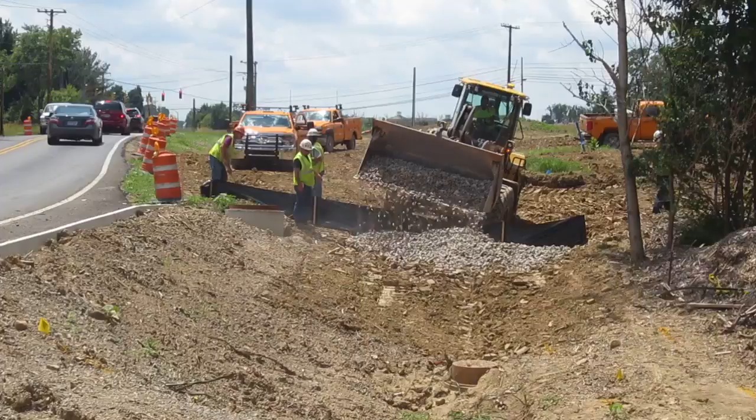Here we got some guys putting up some black plastic and front end loading in some gravel and doing stuff. Don't really know what that's in aid of, but that's what they're doing right now. High drama.

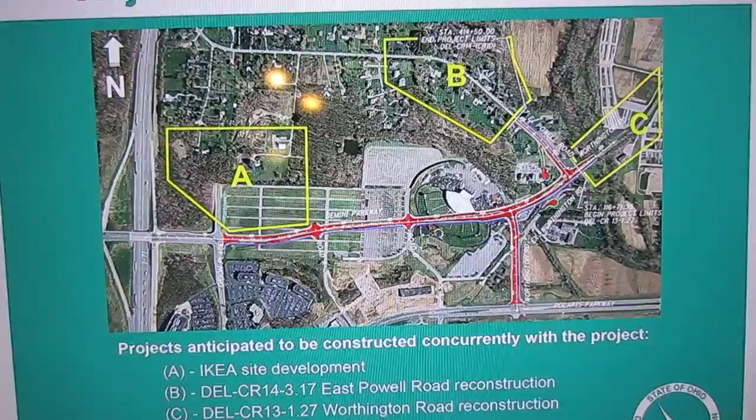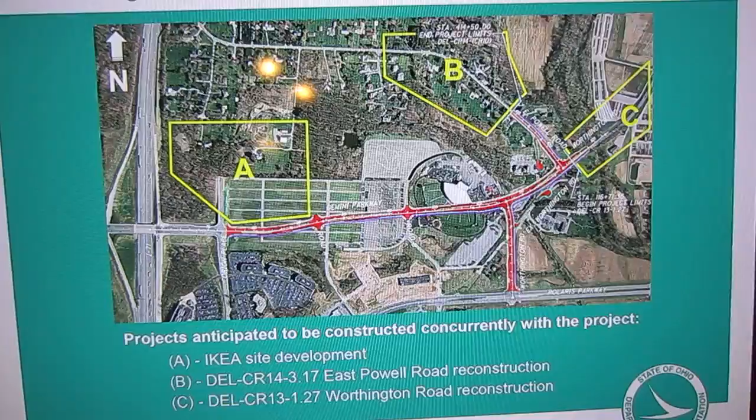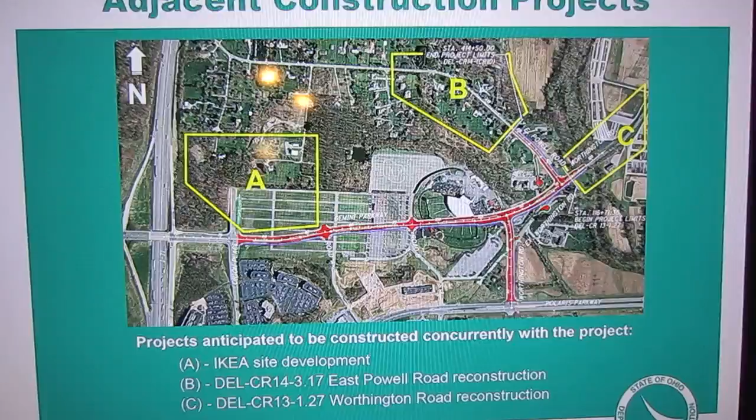Now look very closely, guys. Here is what's happening around me. Area A is the IKEA site development, where we're getting a new IKEA store. Area B is where East Powell Road is going to be widened. And area C is the Worthington Road reconstruction.

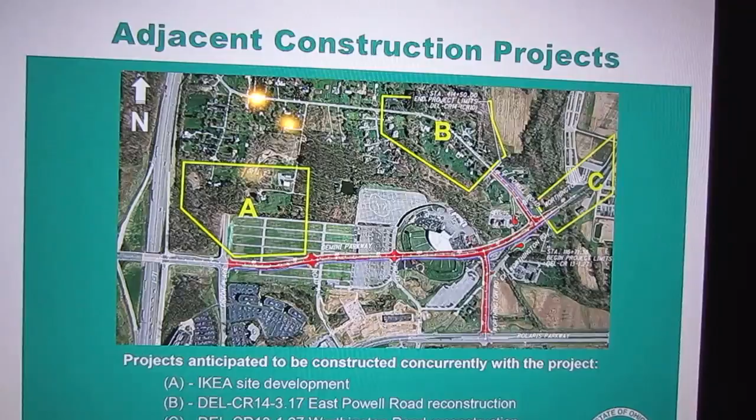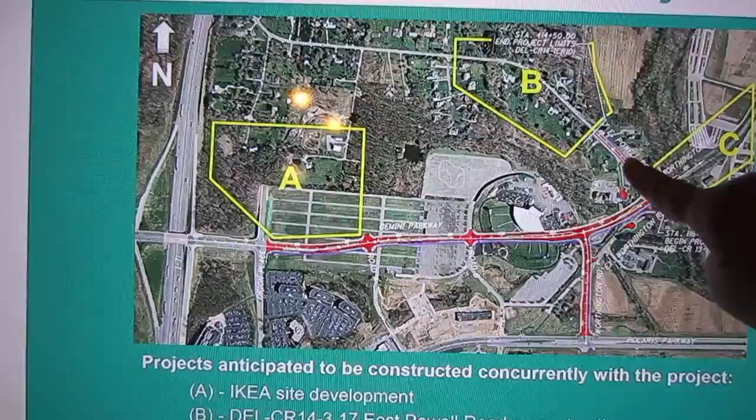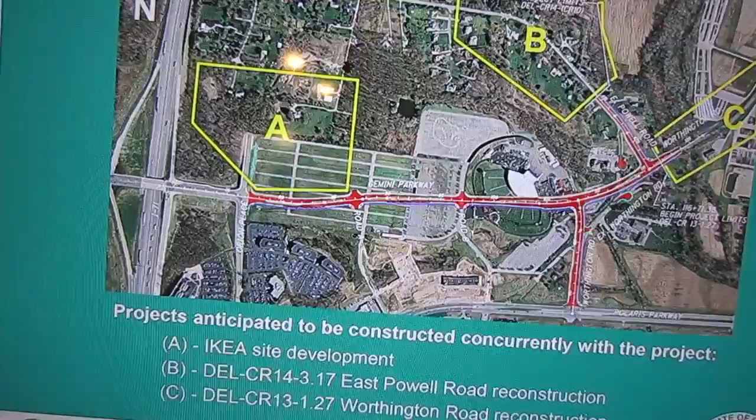But note that this is going to be the new Powell Road. This is the old Powell Road as it exists. And here is my property right here. There's Alum Creek, and that's their Acorn Farms nursery over there. So that's what's happening around here.

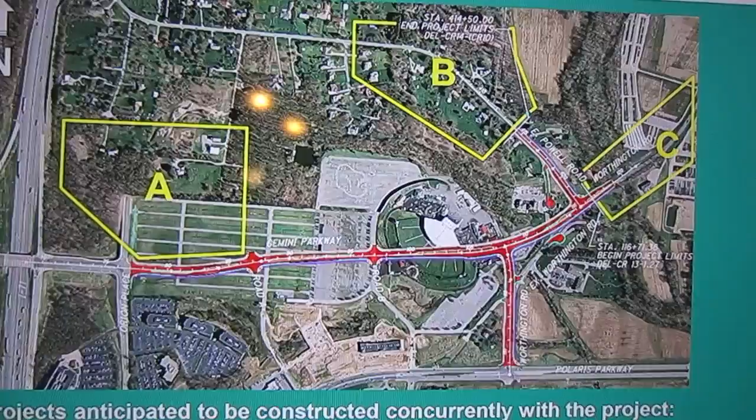Let's get a little closer now so you can sort of get a closer look at it here.

Now here's a little larger, well, it's a different view. It might give you a better idea. This is an existing road called Orion Place. It comes off this road down here called Polaris Parkway, approximately about here where there's an intersection, down here. This is going to be a new development of the big Swedish IKEA thing here.

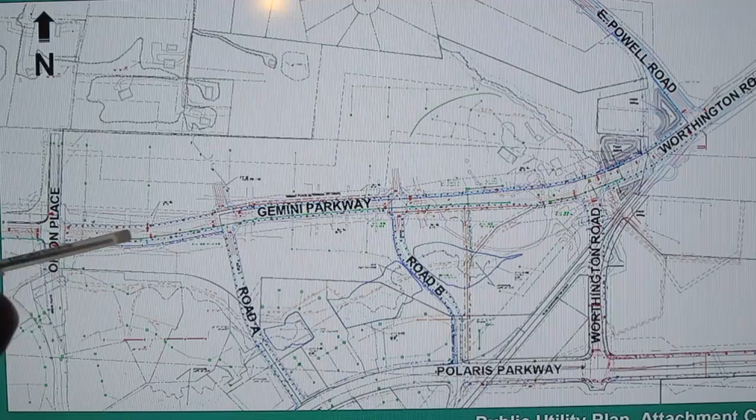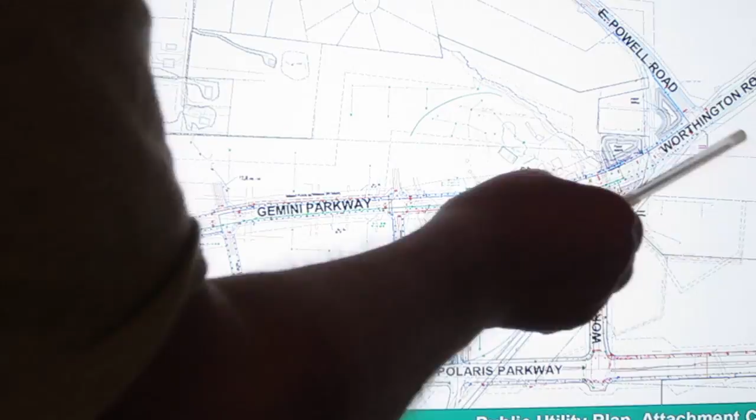Gemini Parkway ends currently, or did until recently, right here. They're going to shoot it on down here to connect with Worthington Road and go across over to Africa Road in this area. Here is the current existing East Powell Road. This is going to be the new Powell Road.

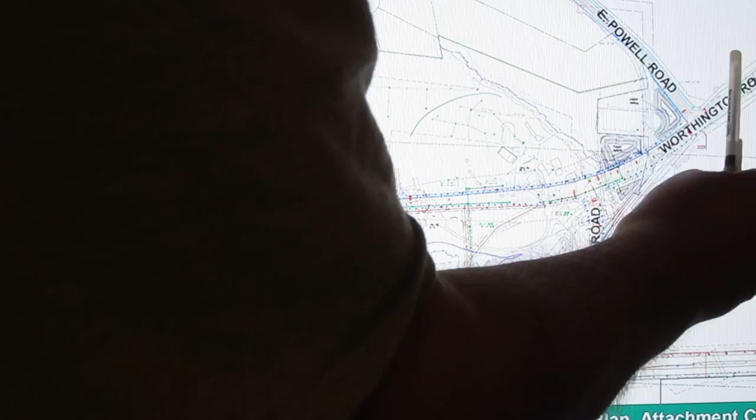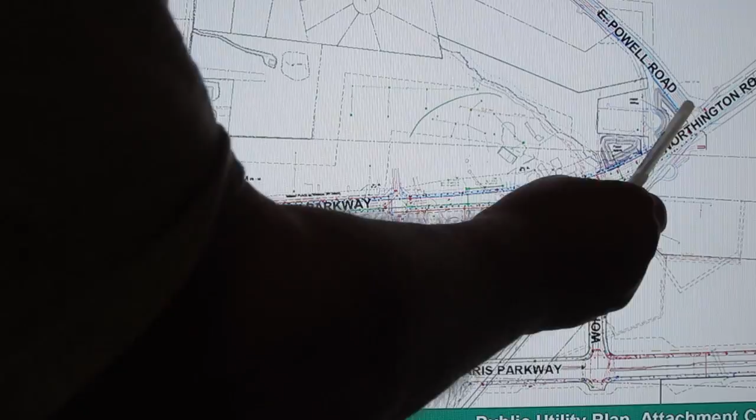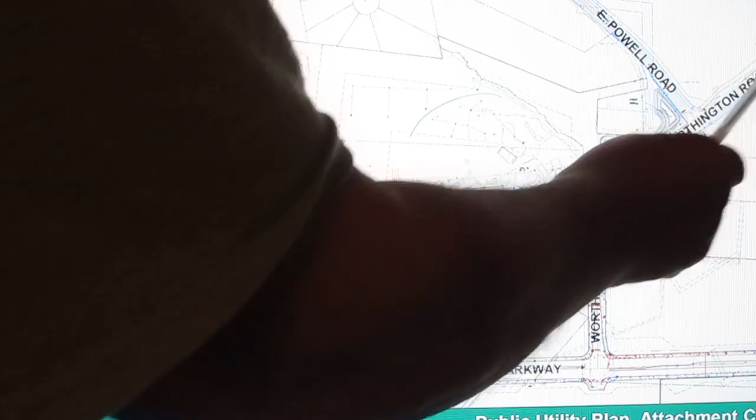Currently, if I want to go out of my house, what I do is I go out of my driveway about here, I'll get on Worthington Road. I'll go down to this drop down, which is also still called Worthington Road, and go to Polaris Parkway. Or more typically, I just use Powell Road to go where I want to go to the west of me. I almost never go east, and I almost never come back from the east. That was the whole thing about the driveway.

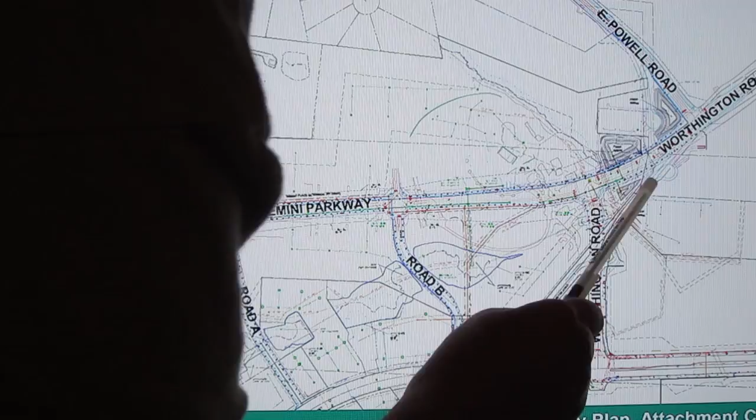So you can see what they show they're going to do. They're going to make a cul-de-sac where the old house was. For Liz and Henry's, and indeed my neighbor Fred's place, Liz is about here and Fred's about here. What they'll do is use the existing road bed of the current Worthington Road, turn it into a cul-de-sac, and run a driveway off that. Here's an outfit called Laurel Health, and they'll just have their current driveway off the existing road. But it's going to tie into this drop-down road here.

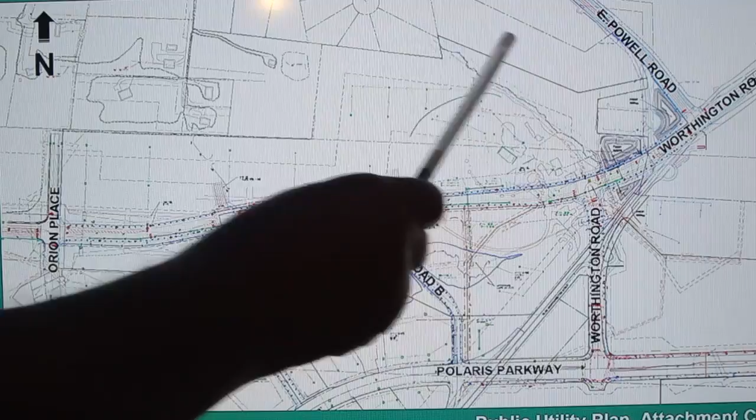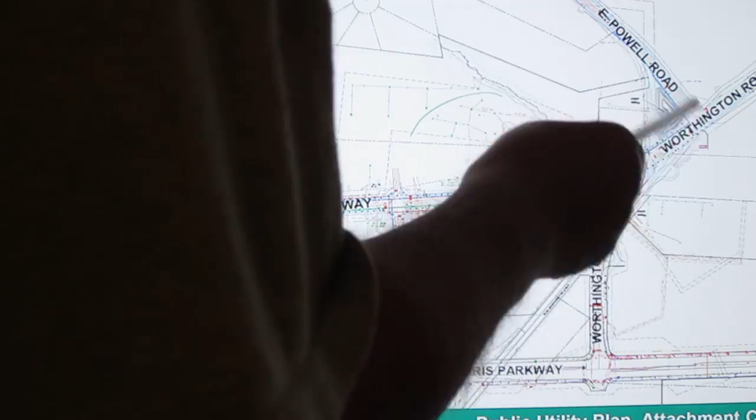And you can see how many lanes. On Powell Road, they're actually hypothesizing 4 lanes, 2 this way and then 2 that way, and maybe even 3 actually, it's hard to tell. So that's what's afoot, and they're going to have new roads that are still as yet unnamed coming in here and dropping down to Polaris. So that's what's planned.

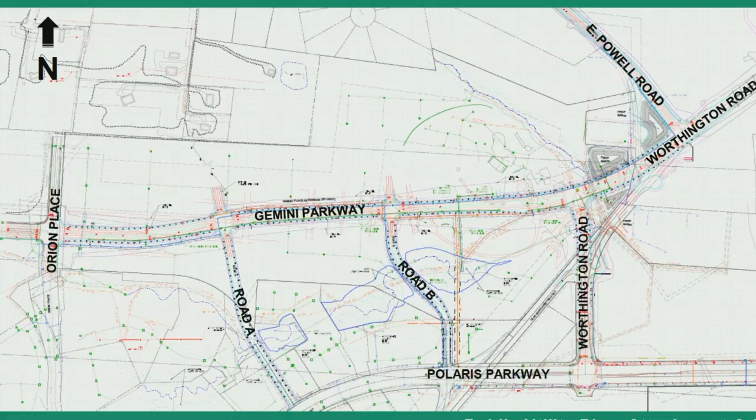Here's a closer look at what I was describing on the previous panel. This will be the new East Powell Road. Here's the current one that drops down, okay? Here's my house, here's my pole barn, here's my dog run, here's my driveway. This is going to be the widened Worthington Road, 2 lanes coming west, 2 lanes going east, and then the concrete divider that will prevent me from turning into my driveway when I'm approaching from the west, going to the east.

Here's the new Powell Road. You've got 2 lanes going to the west, well, it's really the northwest, and 2 lanes going then to the southeast. But what they do is widen it down here in this area to have 2 right turn lanes and 1 left turn lane here right in the very middle. So that's the plan for the new East Powell Road.

There's going to be, they're going to put like a little courtyard thing for this little preschooly thing they've got going on here. A separate little thing there to turn off to a new development that's going in here where the Baggses used to live.

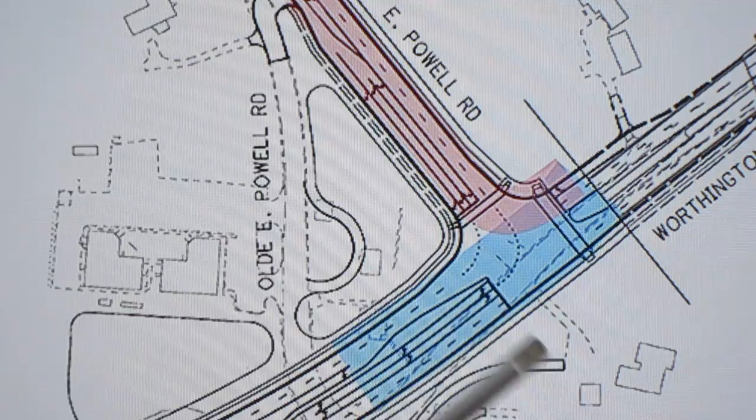And then here's Liz's house. And then you've got, she's got a building. I think that's meant to actually be Fred Marsh's house, but it really ought to be more like this.

But as I said, there's going to be a drop down here. This part is actually going to be the existing Worthington Road, because it changes alignment as it comes in and goes to this thing. So that's what they're doing, let's see.

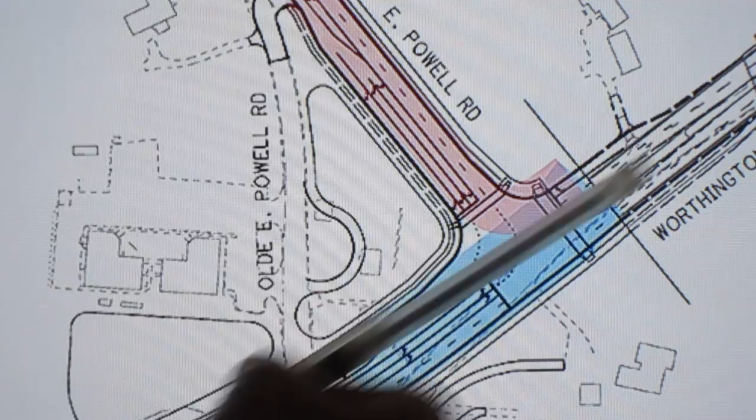And apparently you're going to have 2 left turn lanes here, 2 lanes going here, 2 lanes going this way. So that's what's afoot.

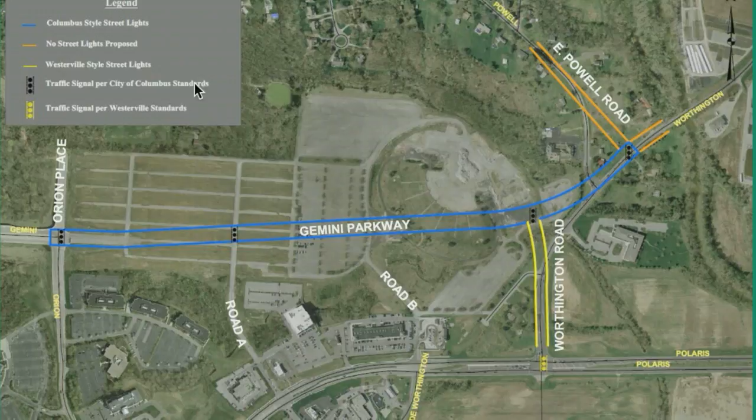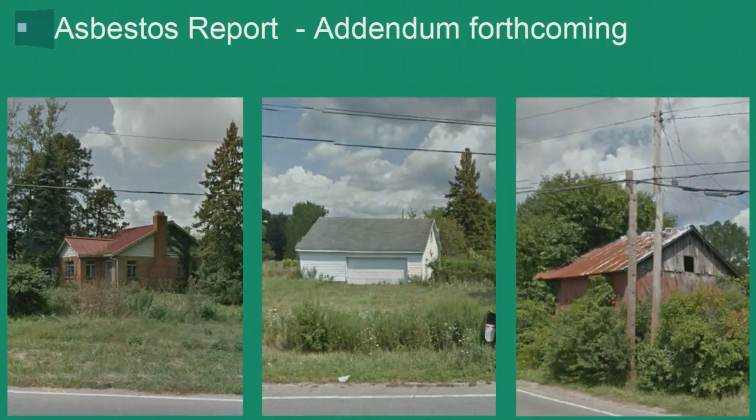Bye-bye, 3829 East Powell Road buildings. And look what they had to say about you here next. Well, this is all news to me.

Confirmed asbestos-containing materials in approximate quantity. Window glazing compound in the house. That would be, they numbered these buildings. House is number 1.

Stone linoleum - I've never heard of the phrase stone linoleum. Black sink undercoating and duct tape. Well, everybody loves duct tape.

1, RACM - Lord knows what that means. 2, category 2, non-friable asbestos-containing material. I guess that means, I don't know, either it crumbles or it doesn't crumble. Usually friable means crumbly, so maybe that's just the linear fibers that aren't a problem. I don't know what RACM means. Royal ass cunt motherfucker, maybe, I don't know.

Inventory of asbestos-containing materials. Exterior windows, window glazing compound, 20 square feet. Bathroom, stone linoleum, 50 square feet. Kitchen, black sink undercoating, 5 square feet. That must have been a hell of a sink, although I don't remember it being that big. Basement, white duct tape, 30 square feet. Well, okay, by your command, guys, on that one.

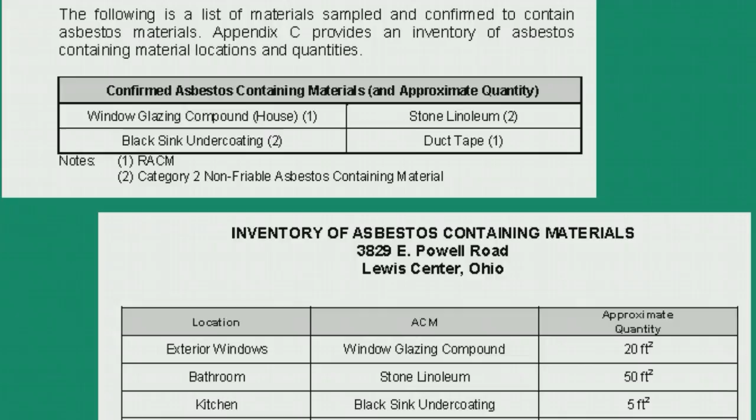There won't be any street lights down in front of my place, well, immediately in front of my place. You'll be able to see them though. So as bright as it is already, it'll be even brighter. That's a mixed blessing, I guess - it means I have to travel about 600 or 700 miles to the north to actually see stars.

These guys, I showed you, were putting in this gravel and plastic, and it occurred to me that they didn't need to leave the plastic in place because they were making a ditch. So they took the plastic out, made a ditch so any runoff's not going to go anywhere other than into the ditch, and then they're going to stop it at this thing that I showed you down here at the start of this video.